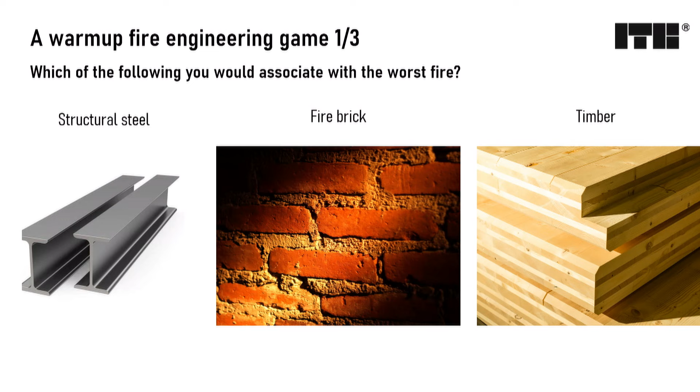If you thought timber, you're probably already ahead of most architects and the mainstream media, because from what I read in architectural journals, steel is perhaps the worst, and timber chars and doesn't burn, which I will address later in the talk. If you thought timber, your reasoning is likely based on material science and the fact that combustible materials usually lead to a bigger and worse fire outcome. I would second that way of thinking.

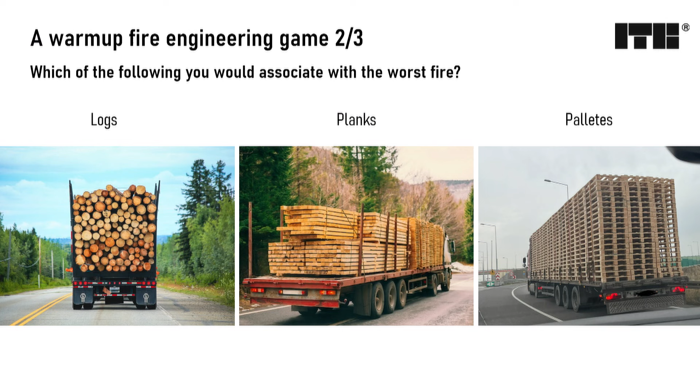So if timber would be the worst, let's say we transport it. Which of those would be the worst fire risk? I guess the third one, because as fire engineers we understand that the porosity of the material, the surface area of the flammable material, and the way air can penetrate the truck make the third hazard really stand out. It's intuitive for us that this scenario would end up in the worst fire hazard.

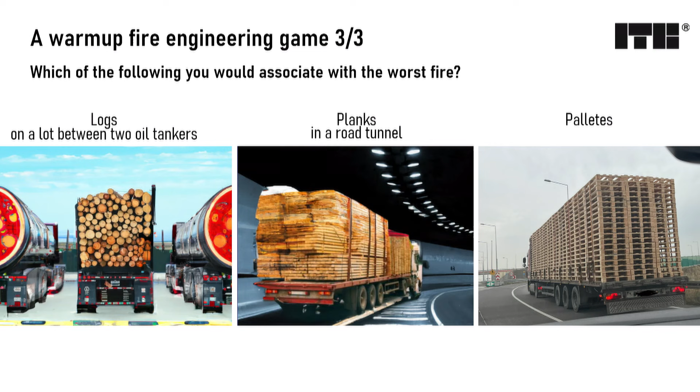So this was simple, but let's shake the environment a little. How about now, if we park the trucks? Now it's not that obvious anymore. The left one, not a good chance that all tankers will catch fire, but if they did, that's a low probability, high significance fire. The middle one won't be a huge fire because it's planks, but statistically this one will end up with the most damage every time it burns. The third one is the biggest fire, but it's outdoors, so not a big threat.

So it's not just about the materials we are using. It's not just about what we do with these materials. And it's not just about where we are using them. It's about all of these things together.

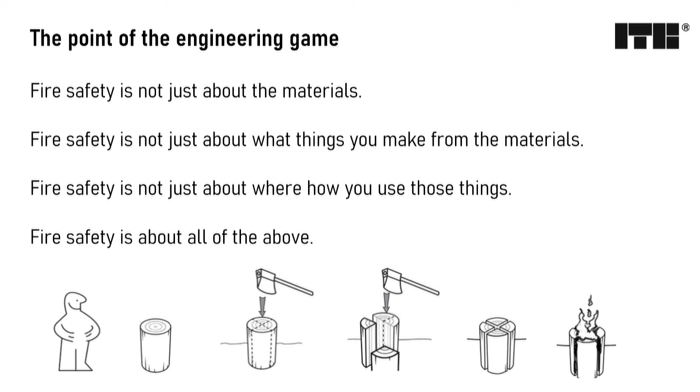And this makes discussing fire safety in the world of continuous innovation very difficult, because many stakeholders would like to focus on one particular aspect of this puzzle, where all of them are perhaps equally important in solving the major problem. I would say the issue is in three layers. It's in the product layer, in the material layer, and the fact that it's a separate layer is an issue on its own.

If you think about the products, they're often certified, they are compliant. And people who bring these products to the market only have incentive to act on this layer. They do not have incentive to act on a building layer or on an assembly layer, because they're not certifying buildings, they're certifying products. They want to put the product on the market shelf, and their

responsibility ends here. The second layer, assemblies, so how we put the materials together and form larger parts that then constitute our buildings. This usually has no owner. There's a construction company that builds that, but the construction company does not certify its construction during the build. It has to be designed according to regulations, and it has to be executed as per the design.

And then you have the building layer. The building layer, where the whole building and the environment in which the building is placed is the battlefield where the eventual fire will take place. And we also, to some extent, design these buildings, but it's difficult to say we certify or do other things to them. Now, all this puzzle together, this is the fire safety of your building, from material to the building level, where different actors would act in a different way.

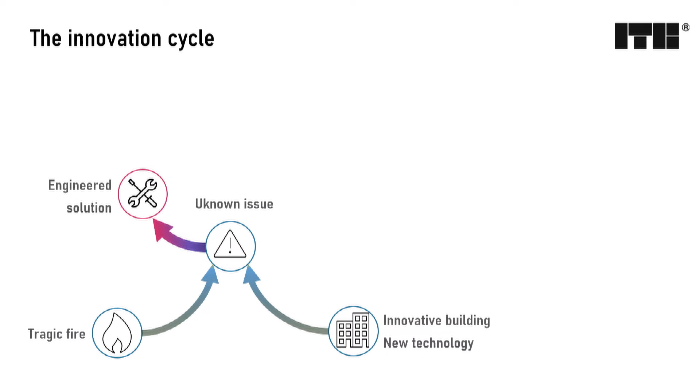So if you think about how innovation happens, I like this innovation cycle, which shows how it should happen. So let's start with the new technology innovation, or a fire that has surprised everyone. And from this, we understand that we have some issue. We're engineers. What engineers do, they engineer a solution. So faced with the issue, we try to find a solution for the problem. Now, to make sure the solution is correct, we want to verify the solution. So we would always also go to experimental verification of some sort, maybe some simulation tests, whatever you use to

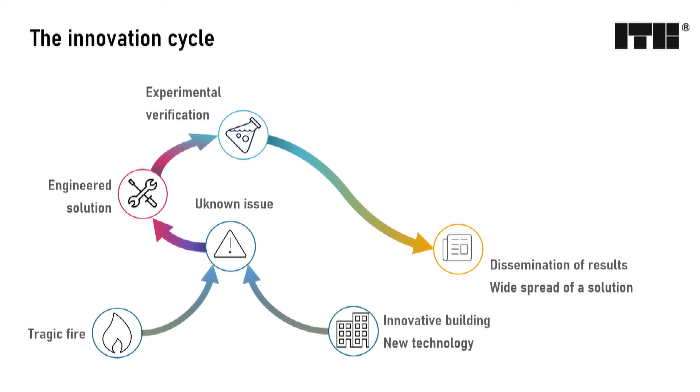verify your solution. And once we confirm this point, we disseminate the results of our solution, first of all on the building that we were talking about. But then again, our solution may be a starting point for someone else on a similar building object with a similar problem. And that's when the solution spreads in the environment around us, where people start to accept it. And eventually it reaches maturity where the solution we worked out is the new normal. It's the standard. It's in the law. It's codified. And everyone is using that up to a point where we face a new issue.

So I would claim that for a great chunk of the history, the innovation cycle would be like that. We would face the cycles of innovating, standardizing, and facing new issues. The problem today is this doesn't work anymore. It's happening too quick. If we reach this point, we're already good, and often we stop at this point. That's why it's not just fire safety. It's not just innovation. It's really a race between those two. The speed at which people innovate for good reasons is unparalleled to our capacity to research.

So we need to find ways how to navigate this landscape in these circumstances, because we're not able to change circumstances. We cannot tell the world to slow down. Elon Musk tried to tell the world of AI to slow down, and well, not really happening. So we cannot be Elon Musk. Come on, guys. We cannot tell the world to stop because we need to solve our stuff. So I also feel that it's not always a race.

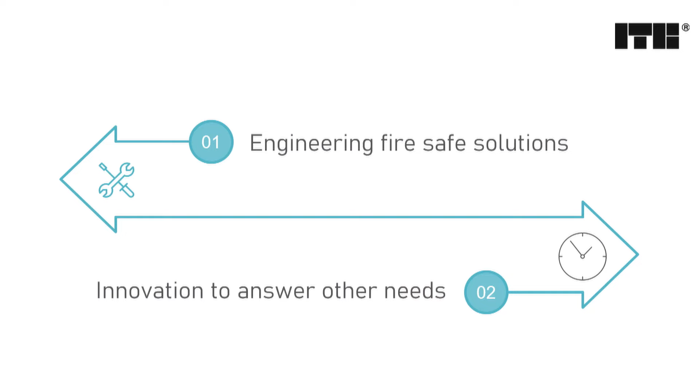Sometimes it feels like pushing the line, because the forces of innovation that respond to other needs than fire safety usually take our solutions in the opposite direction than where we would like to take them with fire safety. I feel that whenever we find a new brilliant solution for a certain problem, it usually ends up horrible in fire. But that's a thing that we need to be aware of, and that we need to solve for our colleagues working elsewhere in the society.

So let's try to talk about some innovations. Let's try to talk about some novelty. Let me take you to my innovation town, where we are going to innovate and discuss fire safety as we go. Let's start off with compartment fires.

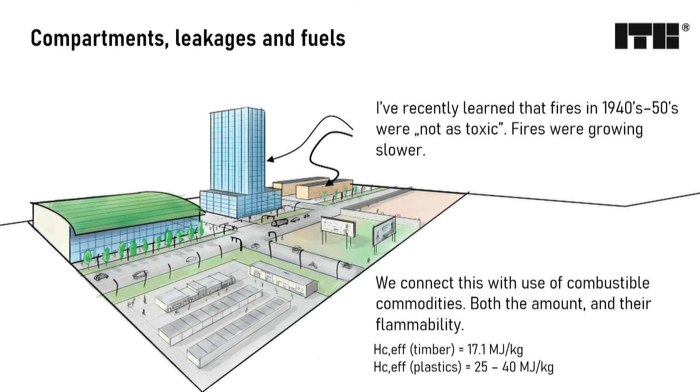In my podcast some weeks ago, I had the massive privilege to interview Professor David Purser, the toxicological master of fire, the most renowned toxicology scientist in fire science. And what he told me shocked me. He said that in the 40s, 50s, the fires were not that toxic. And I'm like, well, that's not very chemical, is it? Fires are toxic because they produce toxic products. But that's not the point.

The fires were not considered that toxic because you had lower amounts of smoke-producing fires because the fires were slower. You had less combustible materials, both expressed in the mass of the combustibles that we have now in our houses with all the plastic appliances and all the foamed products that we use all over our spaces, and also through the fact that the effectivity of combustion of these things increased. So there's simply more material, and it's more combustible, which ends up in larger fires.

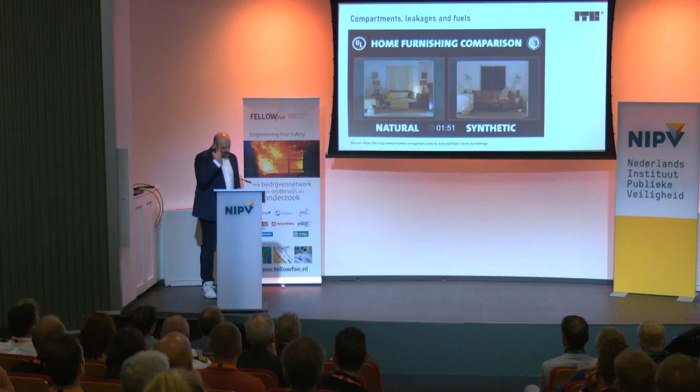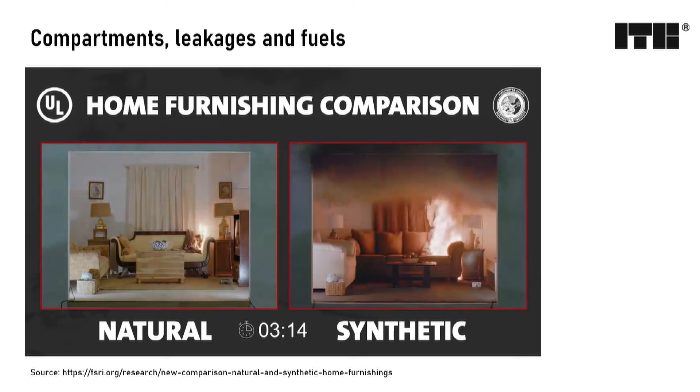I really love this comparison of old versus new performed by Fire Safety Research Institute. I've heard Robin was doing this test, so if you want, he can tell you more about this comparison. And what it shows is a room with old furniture that is built with natural materials, and a room with modern furniture filled with synthetic materials. And as you can see, more materials, more flammable materials leads to worse outcomes.

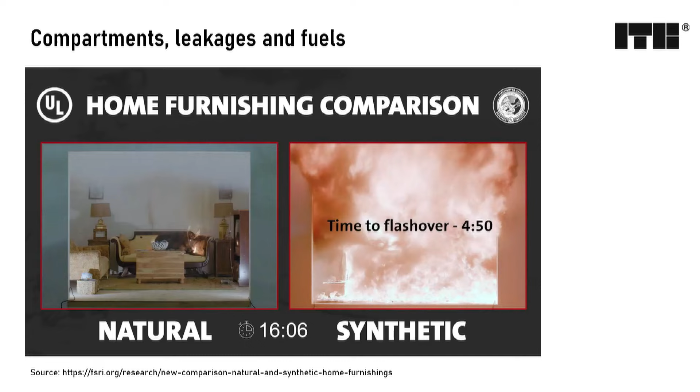Fires are growing exponentially, but they also grow in certain events. If you reach the flashover, it's a flashover. You have a very large fire. If you don't reach flashover, you don't have it. It's a smaller fire. It's easy. So when people see these types of comparison, they see, okay, yeah, now the modern fires are worse. It changes. But I would like to point you to a very different thing.

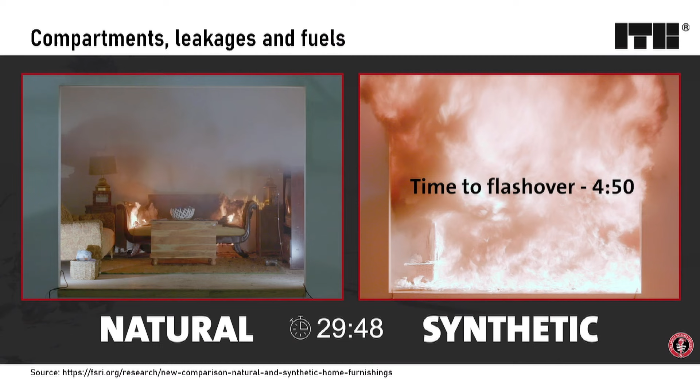What I see in this picture is the change. On the left, I see the fires that perhaps Philip Thomas saw when he was building the foundations of our discipline. These are the fires that Kunio Kawagoe saw when he was finding out that there is a hot smoke layer and a cold layer beneath.

These are the fires that the founding fathers who set the cornerstones of our discipline saw, and these were normal fires to them. They didn't even have knowledge of the existence of the fires to the right, which are normal for us today. And our whole discipline is based on this beautiful research from the 70s, 80s, where the foundations were set and we're building on top of them. I'm not saying we should question that, but we should understand that the times have changed. And what has been known perhaps is not obvious or is not normal anymore.

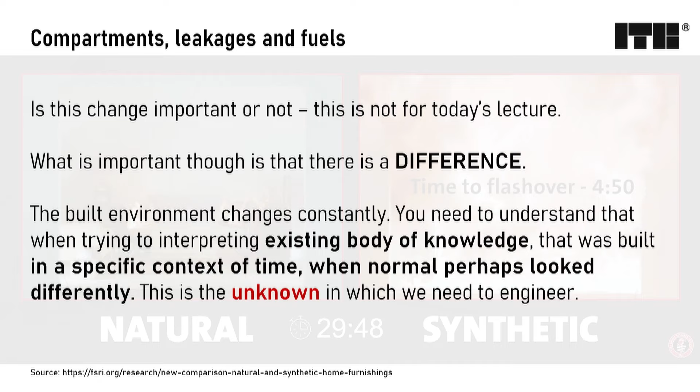So in fire experiments, because we assume that the glazing will eventually fail in a flashover fire, we assume that it will lead to growth of the biggest fire, and these experiments are already expensive enough to not put hundreds of thousands of euros of windows into them. And what this leads to is a world where this very important research perhaps is not fully representative of real world conditions. Because the windows that Philip Thomas was looking through were single layer float glass, which got to 200 degrees and just fell off.

Today, we're living in a world where residential units have very sophisticated multi-layered plastic windows, which just refuse to fall. And in some of our experiments, they were at the point where in my FDS simulation, my FDS would throw them away because I broke the temperature point.

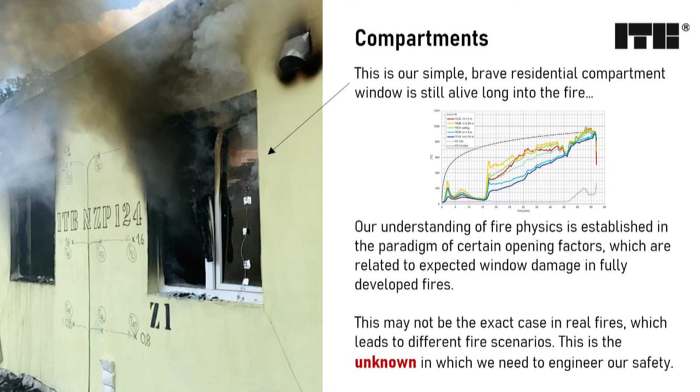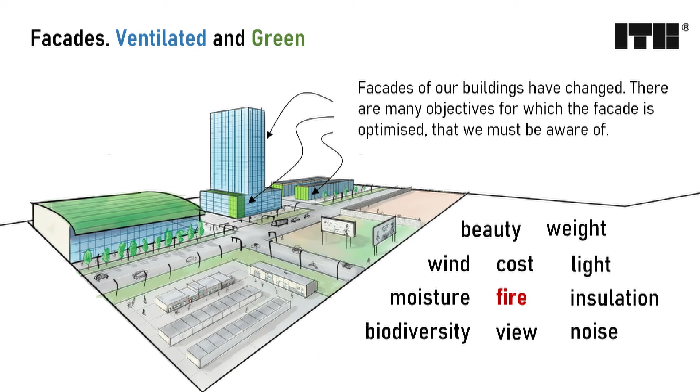The second thing, perhaps my favorite, facades. So boy, facades have changed in the last 30 years, and they're a place of massive innovation. One thing that we tend to not really take into consideration is that fire is just one of many objectives that facade people have to take into account, many. And as fire engineers, we're very bad at communicating in a way that we take information from others and give our opinion.

We usually try to evangelize them that fire is the worst thing, you need to defend against fire. But we tend to not listen to them, that they need moisture control, they need weight, they need exposing certain views of the building. They don't take into account that it's a beauty feature of a building. From Roman times, the beauty of buildings was one of the main features, and it remains till this day. And this beautiful building is a statement to that.

There is a need for biodiversity. There is a need for preventing wind, noise. A lot of objectives, fire being one of them. And perhaps all the things that work well for others don't work that well in fire.

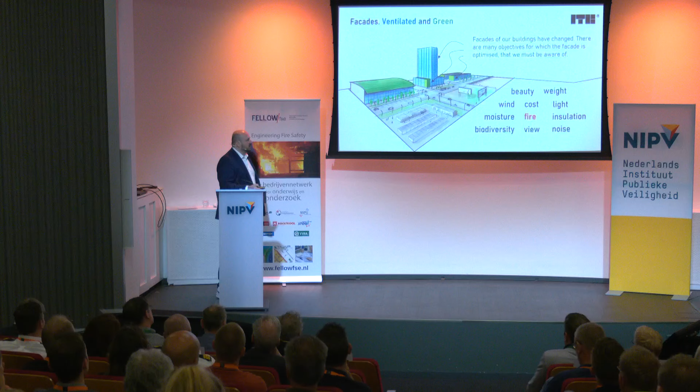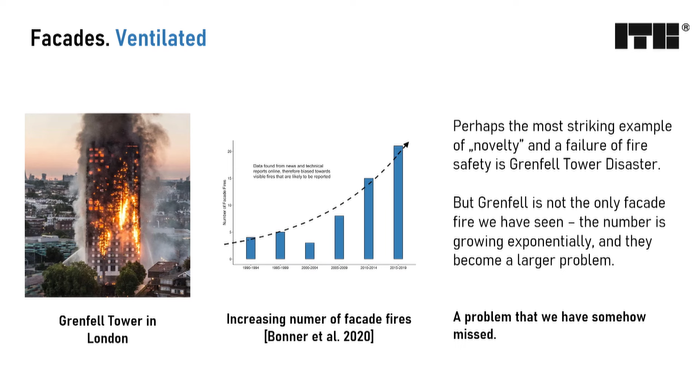And we had some very striking examples of how space was innovated without the fire puzzle and eventually ended up in disaster. And taking the casualties and all the pain the Grenfell Tower did to the victims, an important thing looking at the build industry.

If now in the UK they have to or want to remove multiple facades from multiple buildings, I don't care how sophisticated, beautiful, and carbon neutral the facade of the building was. If you have to take it down and replace it, it's nowhere near sustainable, and definitely not in the circular economy. And these are the consequences of not having the fire puzzle solved.

This is an example of how we failed a race, and both parties lost because the innovation went too far.

In hindsight, we were trying to find, okay, could we point to this with the data we had? We did a very interesting study with Imperial College London and Matt Bonner, who was doing a PhD at the time, where we took 267 tests carried out at ITB on medium-sized facade samples.

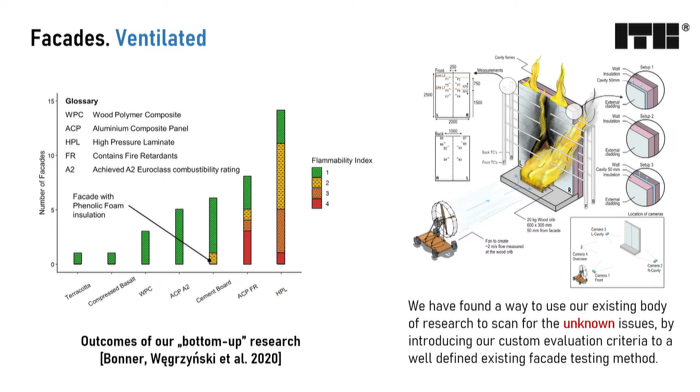And we've applied new statistical methods to investigate them and seek whether this database could really point out the bad solutions. What we did is not go through the standardized means that the test includes, because if a measure becomes the goal, it stops being a good measure. We invented our own measures.

And we immediately saw from our database, yes, there are solutions that stand out as perhaps more flammable, worse. I'm not saying bad, but they stand out as different. There are solutions that are not different.

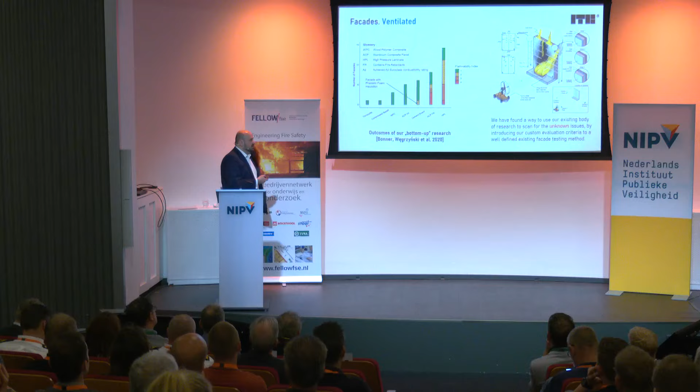So we did this, then we followed up with a very large experimental program where we were just burning tons of facades, medium scale, with different features, comparing materials, but also the ways how you build them, trying to investigate what are the features that make these things worse. Okay, it's a little late after Grenfell, but better late than never.

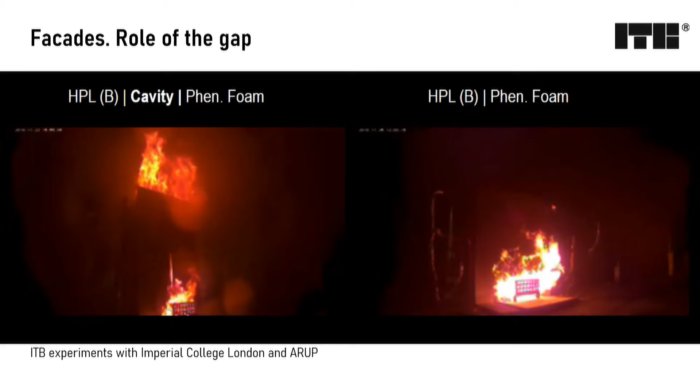And a striking thing that comes up: it's not just about the material, it's a lot about assembly. You could make, to some extent, a flammable facade which behaves quite well if you remove the cavity. And this video is a very nice comparison of how the behavior changes when you remove the cavity.

So if cavity is an issue, we can engineer around that. We perhaps can find a solution. Then I also thought about how we missed this on our radar with all the fire science we know.

And if you go into a scientific explanation, we perhaps know how to solve flame spread in opposed wind conditions through fundamental laws of physics. We also understand that if you rotate the thing and add gravity to the factor, you have different modes of heat transfer that happen, and a completely different flame spread.

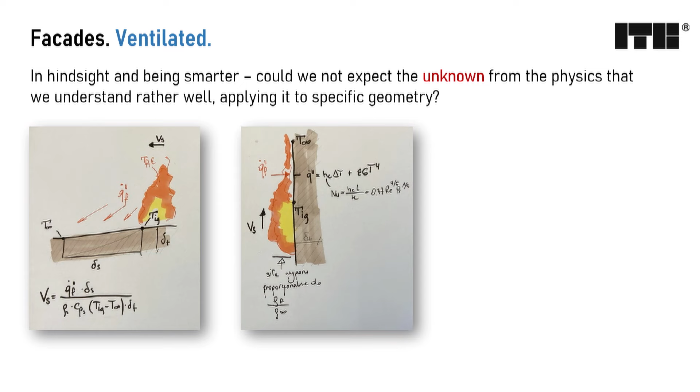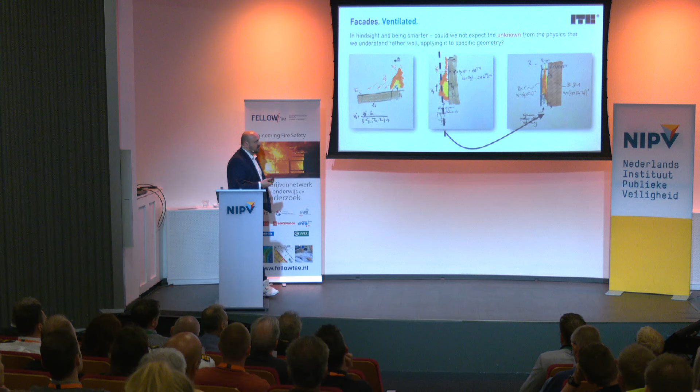And we also understand that if you put a barrier in there, of course you increase the complexity of the problem, but the problem itself changes. We can do that from fundamental laws of physics.

And we also now have multiple groups who are doing this experimentally to seek at what level the cavity becomes a problem. Spoiler alert: the exact ones that we like in our buildings.

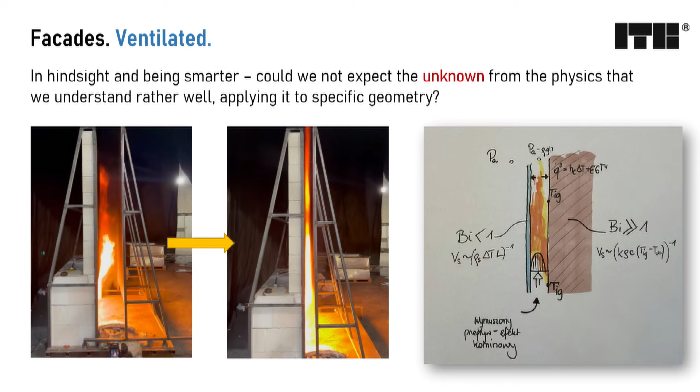That's a little issue. But today we've turned the issue, perhaps a little late, but we've turned it into a scientific problem which we research, and we try to find scientific answers on how to build this properly, because just banning everything on our facades is not going to work. Today we have amazing, amazing efforts.

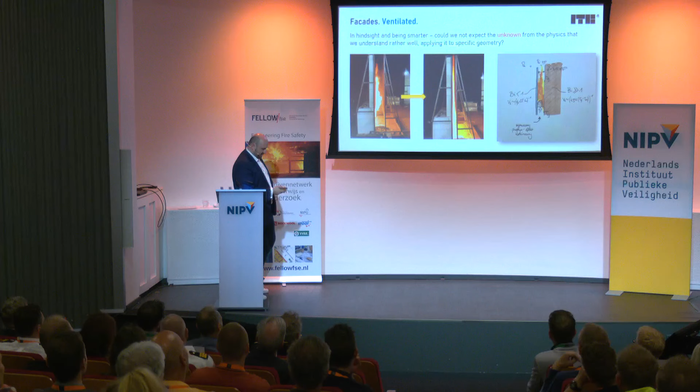Did I run out of time? I put a coin in this? I can continue for 30 minutes on this slide. That's interesting, just a minute. Should I entertain you in some way? I'm taking those minutes, by the way, I'm taking account of that. He was really pushing on time with me, and we were already started 3 minutes late. I've noticed that. We'll take that into consideration. Oh, yes, you will.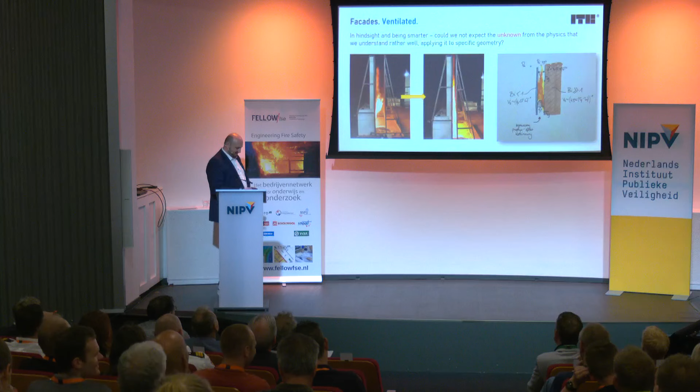I was on a slide like 17 out of 300. Oh yes, that's the slide. Yes, it works, fantastic.

So, at this point, facades are not a novel problem anymore. There are so many people working on facade fires, brilliant minds trying to find solutions for facade problems. We have a new standardized method coming for facade systems. Facades are, in a way, sorted. It's really low chance that we will be surprised by this problem again, right?

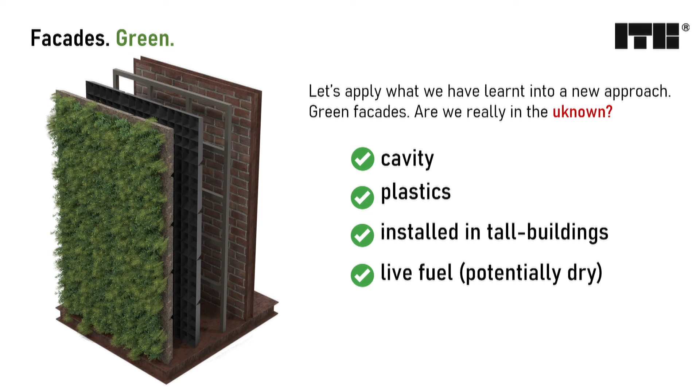Yeah. So in some sort of way, we're repeating the cycle, but of the bad innovation. Because we put cavities, plastics, install them on tall buildings, and to spice it up, we put herbs on it, which can be dry and promote fuel load. And that leads to perhaps fires like this.

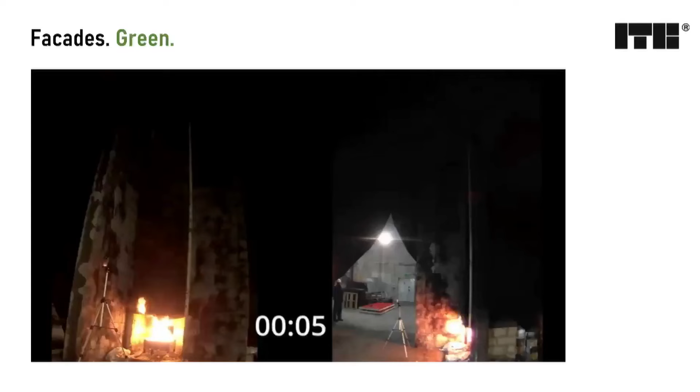This is real-time footage, 5 meters tall facade. A little flamelet touched the plants. And soon you will see the magnificence of this rig in this video. And perhaps the fact that plants burn this quickly is not the worst part of this experiment. The worst part is the fact that there is a cavity behind the pots, and the pots themselves are plastic.

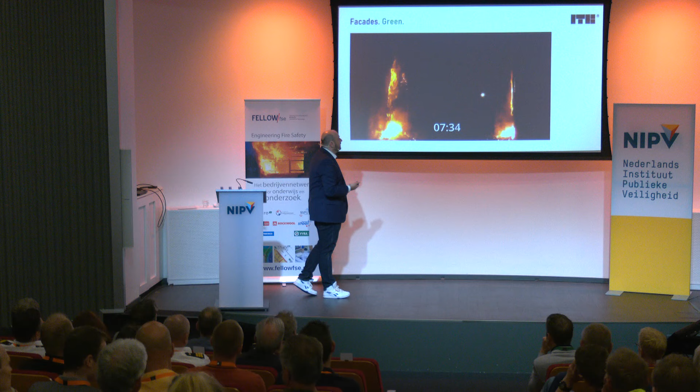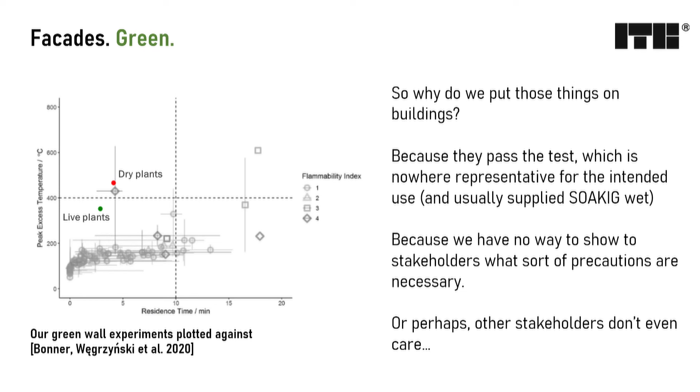We're again at the same problem, and it's not a surprise that we end up with the same outcome of the fire once these parts of the system become involved in the fire. It's kind of obvious it's going to happen, and yet these things are installed on our buildings without us participating in fire safety designing them. And if we put them on our plot, they are very close to the outliers of the previous research we've done. So perhaps we should have seen that coming.

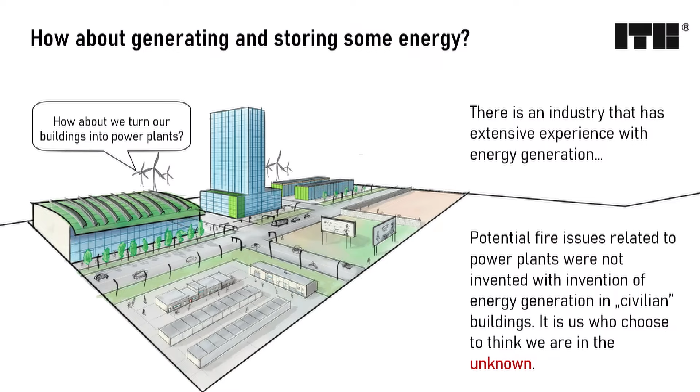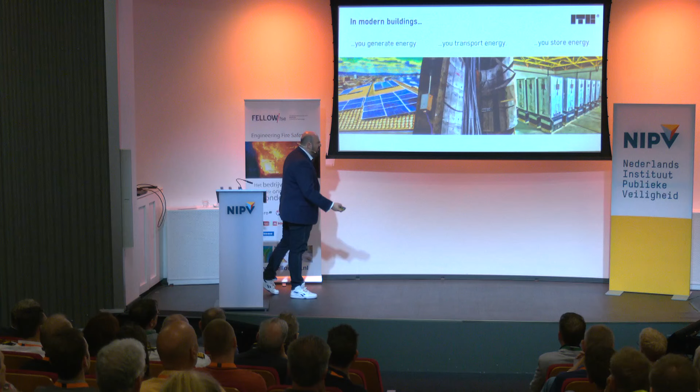So next part, something that was already discussed a lot in this Congress in the brilliant previous presentation. Let's turn our buildings into power plants. This is not a novel challenge. Generating fires in an infrastructure of energy is not a novel problem. There's a whole industry that worked that out, and trust me, they really care about fire safety. So in our buildings, we want to generate energy, we want to transport it, we want to store it, and this brings us into many problems.

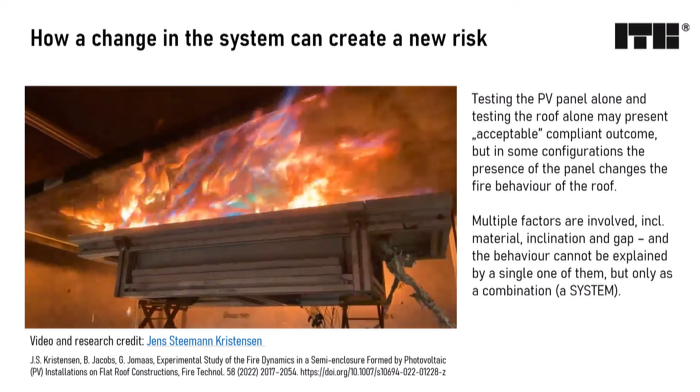First, the roof behavior that changes with photovoltaics. The two I want to talk about, and cable fires. With the roofs, you take a fairly safe photovoltaic panel that's certified, you put it on a fairly safe roof membrane, which is certified, and you come up with an inferno, like on the picture behind me. That's research from Jens Kristensen from DBI, who's researched this for his PhD and produced beautiful outcomes investigating the impact of the gap and the angle of the membrane materials, showing in which scenarios this leads to worse outcomes and where it leads to not so bad outcomes.

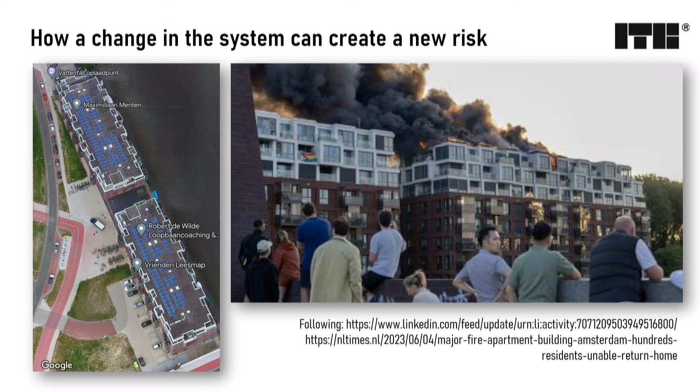And is this a problem? Yes, it is. I mean, I don't want to throw stones, but you had a fire that looks awfully like this one. I'm not saying we should have seen this coming, but yeah, kind of.

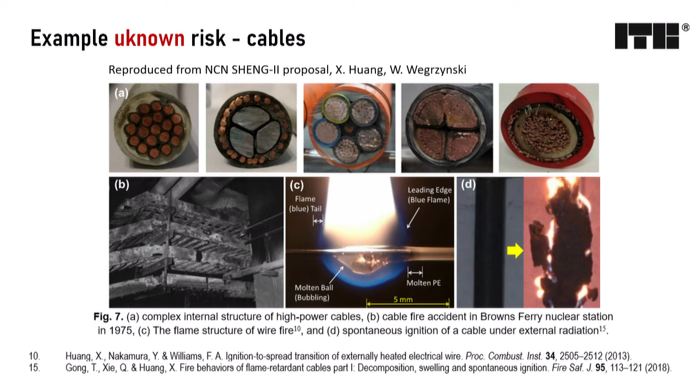For cables, there is a lot of research on cables in power plants. That's the main thing in power plants. You research the damn cables because they are the main source of fire hazard. And we do that. And now, the thing that scares the hell out of the power plant people, we just put them in the shafts in our residential buildings, because you have to transport 2 megawatts of energy from your PV facade to somewhere, right? And we just go and do that without really touching the experience of our colleagues from other disciplines.

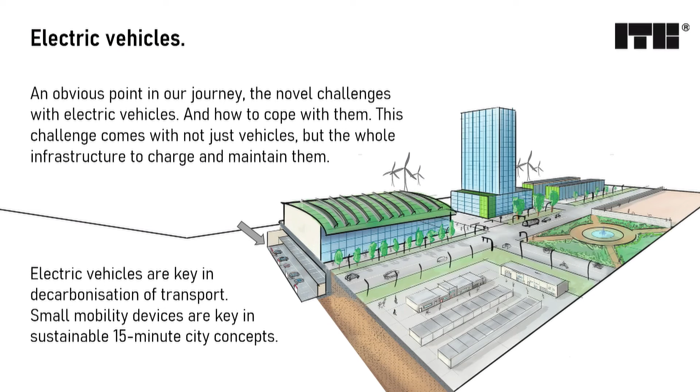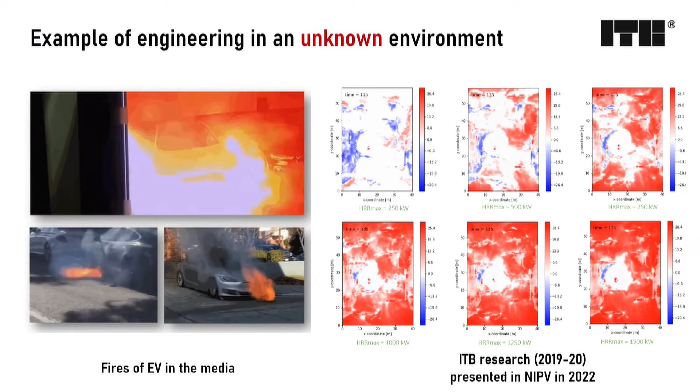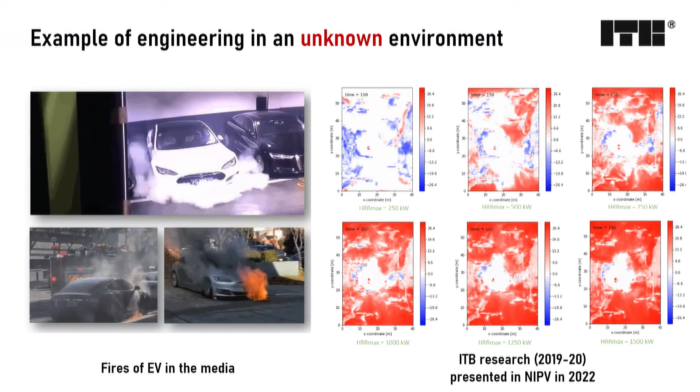Next one, electric vehicles, another everyone's favorite thing. And I've talked about it a lot in the last time I was in here. Here, I have an example of how we approached it. Before we knew what are the fire scenarios for electric vehicles, we already started to explore what would happen if a certain fire happened in a car park of a certain size, to identify which car parks are more likely to be good in such a fire and which car parks are a problem.

There's a whole recording of the last workshop if you like. But this is one part of the hazard.

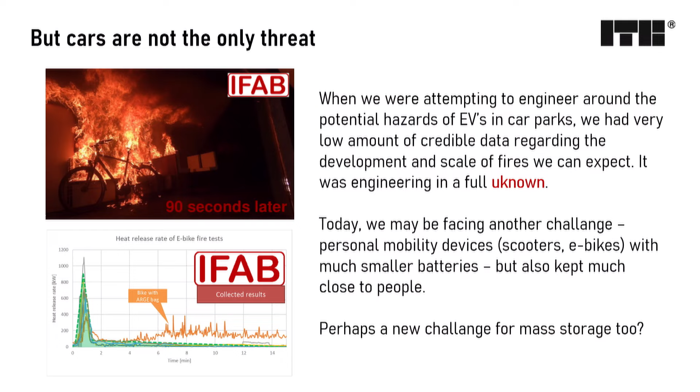Now we understand there's another part, light vehicles. IFAB did brilliant research on electric bikes and fire sizes, and they've shown that the e-bike can generate a peak heat release of 1 megawatt. That's what causes a flashover in a room corner test. That's a very large fire. And in your country, you tend to stack those things in multiple levels next to your railway stations. I'm not sure if this is a fire scenario anyone thought about so far, and it's coming our way.

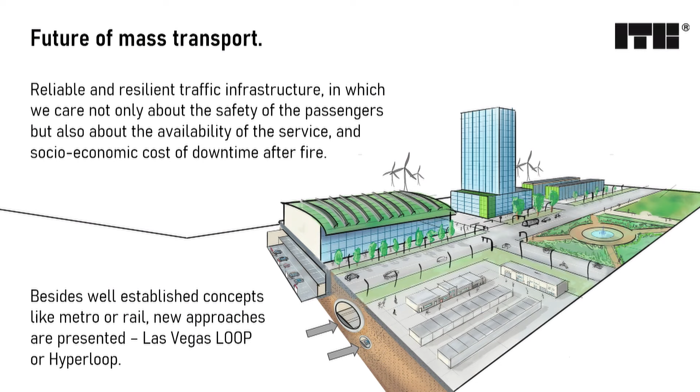Next thing, mass infrastructure. By 2050, 50% of the population will live in cities, so we will need very efficient mass transit. There's a whole space where we try to create safe mass transport infrastructure, and at ITB we're researching that a lot. I'm actually going to speed up that video a little bit.

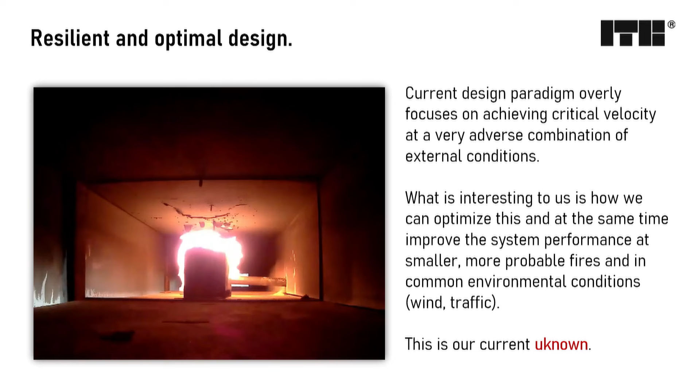In the current paradigm, we try to achieve the level of critical velocity where we control the fire. My question in innovation in this space is: we spend an awful lot of money achieving that, and I'm not sure if it's necessary. It's somewhere we innovate, but I would say we have tunnels covered.

We know what makes a bad tunnel. If your tunnel is small, if you don't have evacuation routes, if you have bad lighting, if you have bad ventilation - these things make a tunnel a horrible place. And we've learned to not build these types of tunnels, right?

So with new concepts, like Loop in Las Vegas, what they're building is a small network of tunnels underneath the city where electric vehicles drive through. Essentially, it's a metro system in which the vehicles are rolling stock.

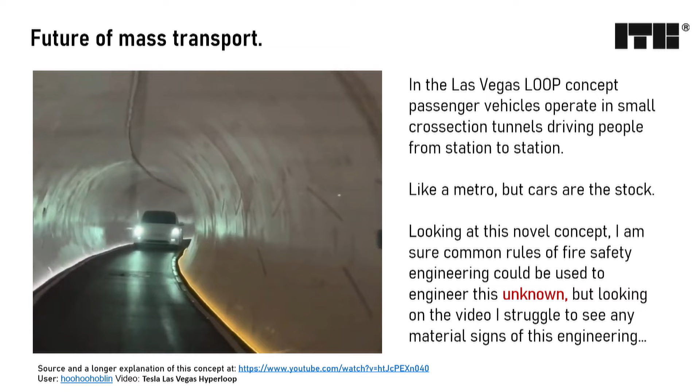I don't want to be sued by them, and I don't want to shame them. I have no idea what kind of novel safety features are introduced in these tunnels, and I would love to learn about them because they seem invisible. I cannot tell from the video.

But in general, perhaps this is the summary of the worst things we know about tunnels, and yet these are being built in our cities.

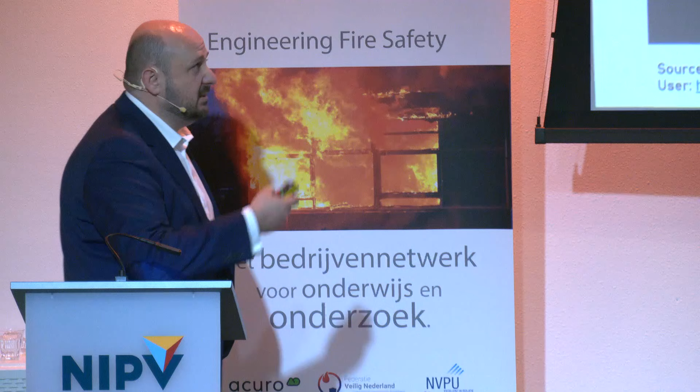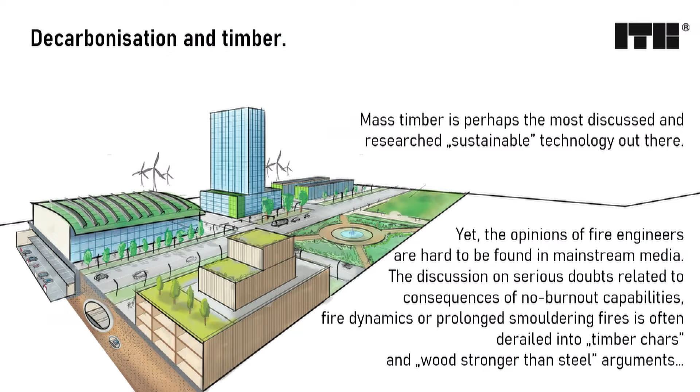Next thing, timber, mass timber. We need to have a lower CO2 footprint on our environment, and a great way of doing that is by introducing mass timber into the built environment. When you read the papers - the magazines for architects - you will learn that timber chars, and it has better fire resistance than steel. In general, it's not a problem because we know how to handle that. Oh, and it's predictable. That's the best part.

I'm a fire scientist for 13 years, and I have no idea how this burns. And these architects say it's predictable. Amazing. I believe this is the approach of the industry because we are telling them where the problems are, and they choose to ignore us. It's not lack of communication, it's not lack of information - it's a choice that we're being ignored.

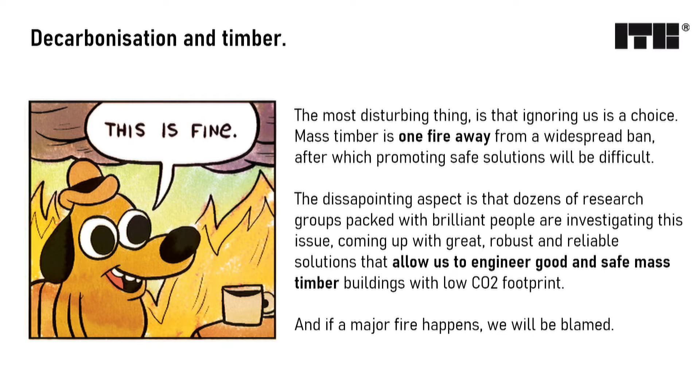And trust me, if a major building burns down, it's going to be our fault. We failed the society, not them. We need to think about how to break into their world, by listening to their needs and finding out how they optimize their buildings, what they want from a building, and put our puzzle piece that will introduce safety into their concepts. We cannot do that by just telling them timber burns, it's bad, you cannot do it. We need to educate them how to do it well.

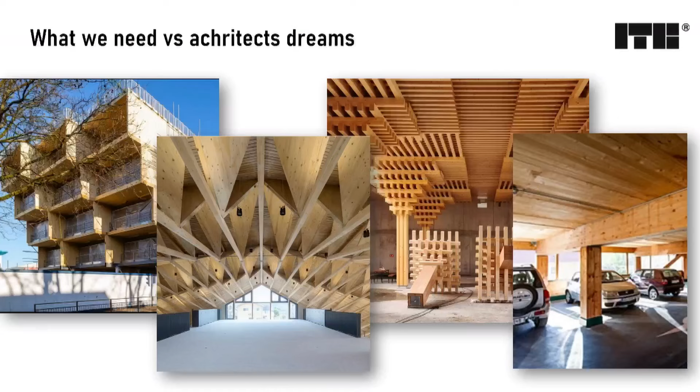It's difficult because they come up with some concepts that, in my opinion... if I think about a low carbon footprint building, I think about simple walls, encapsulated, maybe an exposed ceiling. That's nice. But turning to the one on the right, I would actually like that in my experiments because it takes away the crib-building part in the fire experiment, which is quite annoying. But yeah, we need to explain that to them.

Timber comes with many problems, multiple problems at different levels. I would touch briefly on two of them - fire spread and fire resistance - in this talk. So we've done a lot of research with OFR for the UK Structural Timber Association. These are producers of CLT, and I really appreciate that they choose the path of research and investigation and understanding their product, because I think that's a mindset that's lacking on the market.

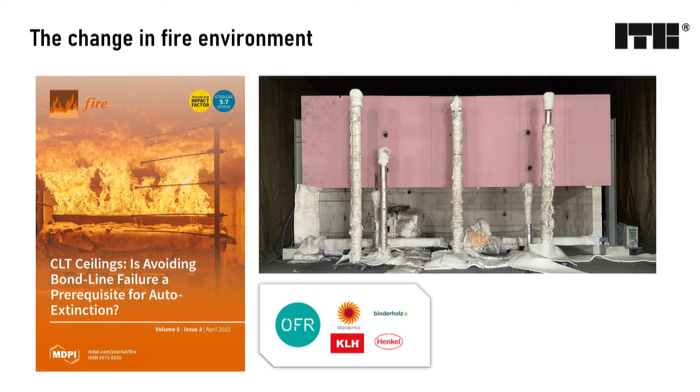We were doing very large experiments, and one thing that's very obvious from these experiments is that you end up with completely different heat fluxes in those fires. It's very fundamental.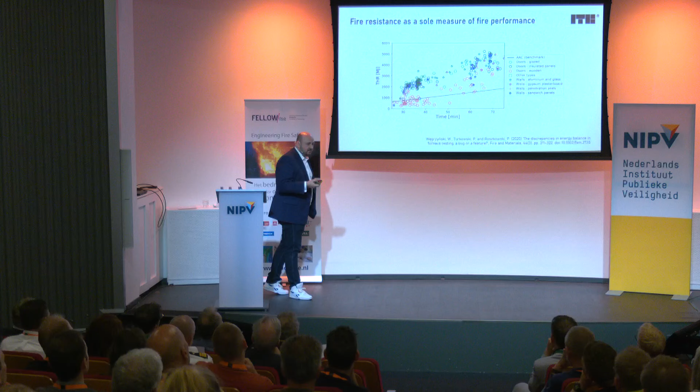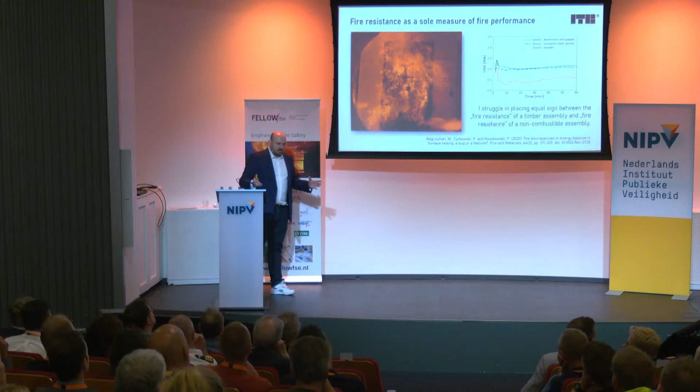The second thing is fire resistance. I run fire resistance tests, and I know that when timber is in my furnace, the amount of energy I put in is much lower than when I burn other materials, because timber self-sustains the fire test. So I have to turn down my furnace to not exceed the standard conditions, since I'm testing for a standard time-temperature curve. So if all the other materials and assemblies I test are tested by me producing fire, and timber is tested by me trying to suppress the fire, I really struggle to put an equality sign between the fire resistance of both.

Yet when a non-professional, someone without this experience, sees the paperwork—R60, fire resistance 60 minutes—no small font says they actually turned off the furnace. It's very difficult to communicate that this is not exactly the same. It's the same rating, but it's just a rating. If you rate a fish on its ability to climb trees, it's a horrible climber, right? It's about what metric is put into place.

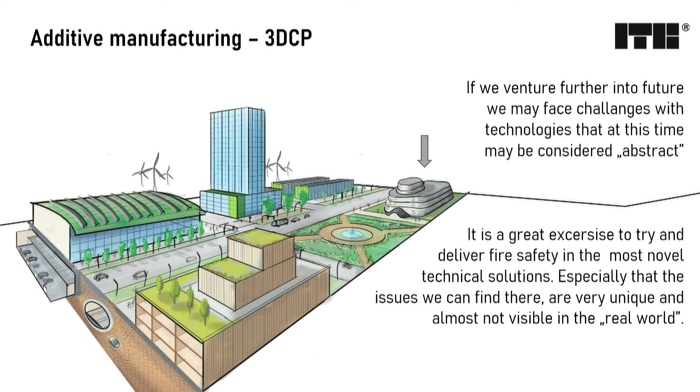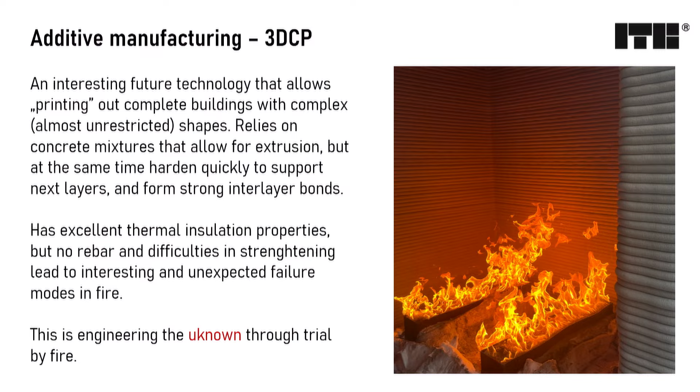Now the last one, futuristic technologies—I love them. We try to develop them, one being 3D concrete printing, and we're very lucky to be one of the few who actually test full-scale buildings like that. I'm not sure it's groundbreaking for us today, but if you wanted to build on Mars, sending a 3D printer there and arriving to a completed building is a way to go. It's a growing technology, and again it shows a completely new array of challenges we've never seen before, mostly related to the non-fire-loaded parts of the building.

The part of the wall near a fire has beautiful thermal insulation properties because the mixture is full of air and very nicely insulative. But we also see very difficult and dangerous behavior on the other side, which we never had a good comparable technology for. So it shows the need for full-scale fire testing to understand how these things will behave, and it's very difficult to expect a concrete mixture manufacturer to do that themselves.

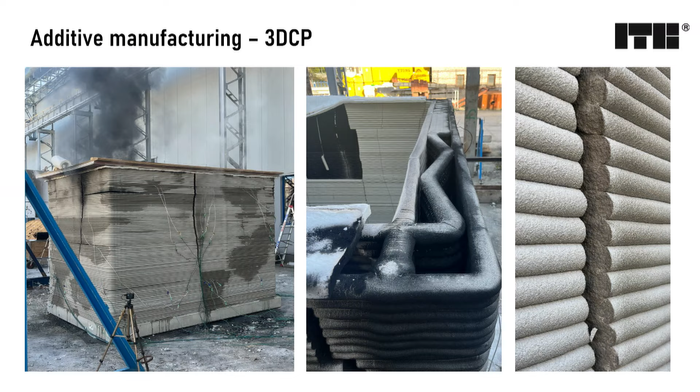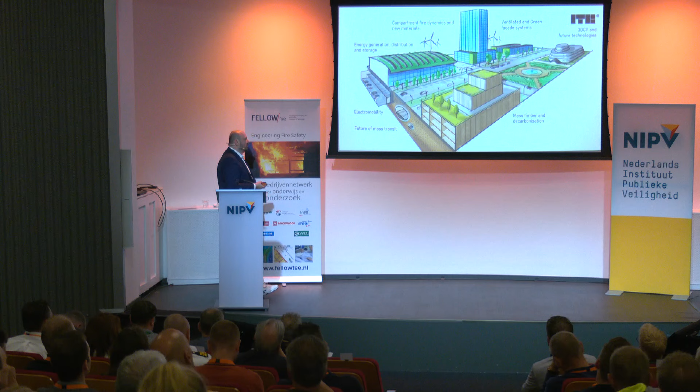So here we go—we went through the innovation town. We learned about fire dynamics, ventilated facades, energy generation, electromobility, mass transit, timber, and 3D printing. So let's try to find some learnings from this.

There are two possible outcomes of this talk. Either what I said was trivial to you and you're offended by me saying such obvious things—that's one outcome. Or, the other one, I perhaps pointed to things that are a novelty even for the fire safety engineering community. Both are expected, and both require us to act.

Because if this is trivial, then why the hell are these buildings out there? Why have we not communicated well enough with the people in power who design and build these things to stop them from doing that? If the first outcome is true, it's not a lack of knowledge, it's a lack of communication, and we have to work on that as a society. If it's lack of knowledge, we need to find out where to put research money, start researching, and communicate it properly. So regardless of which it is, we need to act somehow.

Now, some lessons from the talk I'd like to give you. First: compliance is not safety. Compliance makes a building legal; fire engineering makes buildings safe. It's not the same damn thing. There's a very good chance that a completely legal building is not safe—especially in the world of innovation, where innovators escape the legal boundaries that prevent them from innovating, going around those boundaries to put their products on the market and perhaps creating legal systems that are not fully safe.

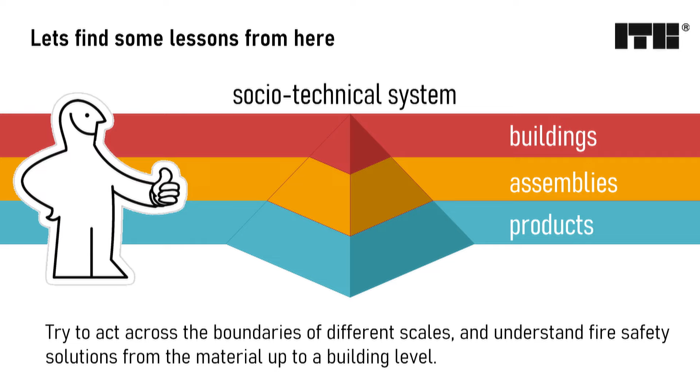When you need to understand, it's about a combination of all three levels. And on top of that, considering the whole environment as a socio-technical system, which includes how people, technology, and organizations work together, and it also covers how we should communicate and when our things are being taken by the society. If you want to read more about socio-technical systems, there are beautiful works by Brian Meacham that you should read because he's covering it the best.

The next thing is, if you want to measure safety of something, you need to measure it at the correct scale, assembled as it will be used in its end-use state, and in a way that is representative for the expected end use. Think about facades. They have beautiful Euroclass B. How do you get Euroclass B? You do an SBI test. What's an SBI test? It's an approximation of a room corner test. What's a room corner test? It's a test that tells you how quickly the lining will cause a flashover in a standardized room.

Come on, is a flashover in a standardized room the measure of fire safety of a fire in a cavity of an external facade? This is not exactly the same thing. Okay, you can use Euroclass to rank materials, sure. A to E, that's easy. But it's not telling you everything you need to know about how you use this particular product in this particular end use, and I believe here we lack the most.

Then, there are some things that for us as fire engineers are obvious to point out. We need to trust in physics. First of all, you have foam materials. They will ignite sooner because that's how heat transfer works. If you have highly insulative material, the surface temperatures are higher, the activation energy is reached sooner, it will ignite. Combustible materials in a large enough fire will burn. No matter how much fire retardants or other stuff you put into the material, if it's combustible, it's going to burn. It's just the amount of energy it needs to burn and sustain that burning.

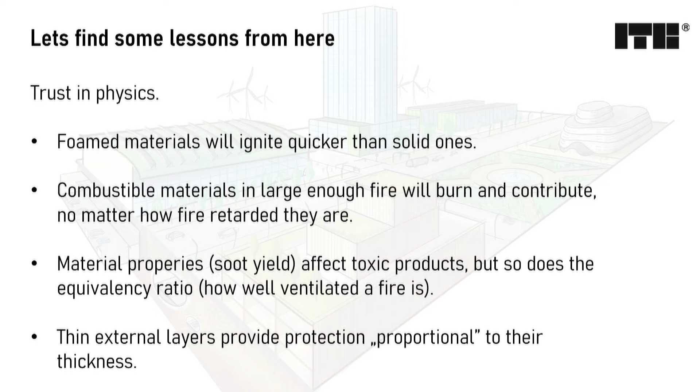Then you also need to understand there are no magical solutions. If you put a thin membrane on the top of your material to pass a certain test, because the fire cannot penetrate this thin membrane, it's just going to do that. If it meets a small fire in a real environment, it's going to prevent it, but a larger fire will destroy this membrane and expose what's behind it, which perhaps is unknown to the system, because we never tested it as a full assembly in an end-use condition.

Geometry is important. Physics is important. Re-radiation and the way surfaces react with each other, how the energy is transported from one to another, will change how materials in the cavities behave, and we will create very dangerous geometries that will lead to dangerous fires. You don't have to have a PhD in combustion to understand that if you build a cavity and you have a chimney effect and accelerated flow of air and combustible material, it's going to end up bad.

So we need to be able to point this out to other stakeholders in a way that they also can understand. And we need to question ourselves, if we find a new solution, how does this change the fire environment and what does this change mean for me and my solution and my building? Ask why as often as you can. I'm not the first or only or the best preacher of this. You need to seek smarter people than me. You need to seek knowledge. There are people that are conveying this in a brilliant way.

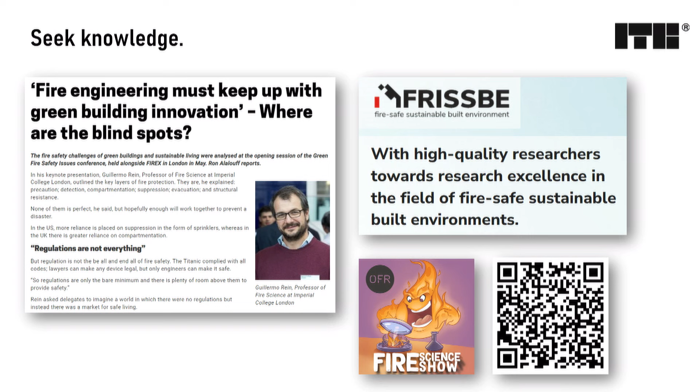There's Guillermo Rein, who's doing amazing research at Imperial College and had a keynote in the UK a few weeks ago, which covers this in a very nice, digestible way. There's FRISSBE, and colleagues from FRISSBE are in here, who are devoted to putting fire safety and sustainability together in one world.